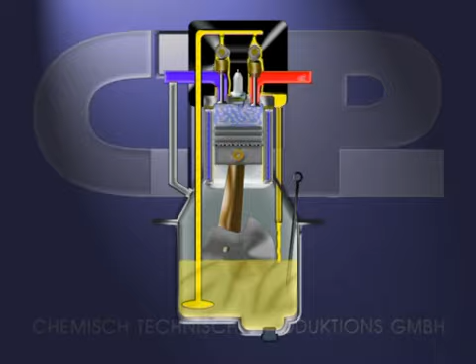Fuel, oil and lubricants and their effects on combustion engines. Every time an engine is run, deposits are left behind, and these always have a long-term effect on the way the engine functions and its degree of efficiency.

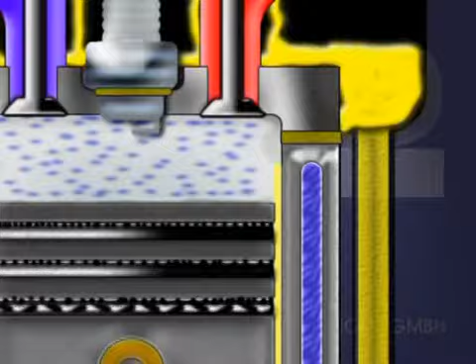In particular, compression is reduced as a result of sediment in the area of the piston rings, oil rings and their grooves. The deterioration in the combustion of the fuel-air mixture resulting from this leads to a reduction in the engine's performance. As a result of this, there is an increase in both oil and fuel consumption.

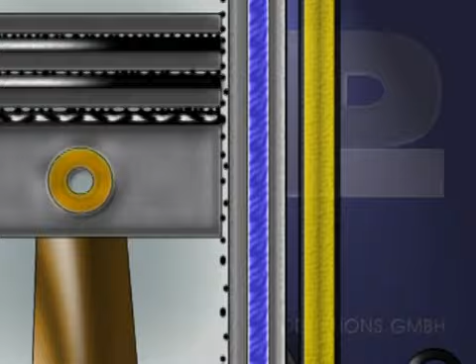This creates a situation where the sediment caused by the combustion process increases markedly, exhaust fume levels rise, and not least, the wear and tear on engine parts escalates.

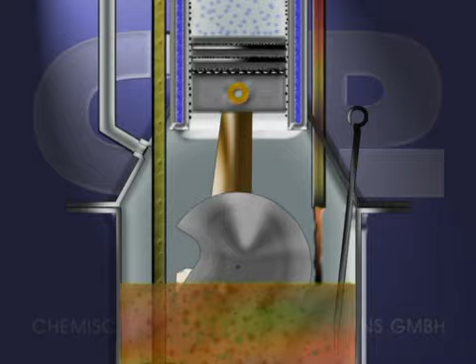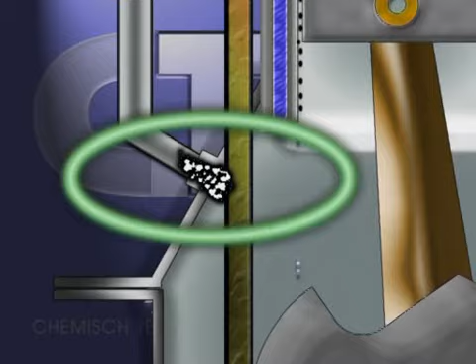Parts of the mixture and combustion gases evaporate in the crankcase and thereby accelerate the speed at which the quality of the oil deteriorates. And this can lead to problems in the crankcase breather system.

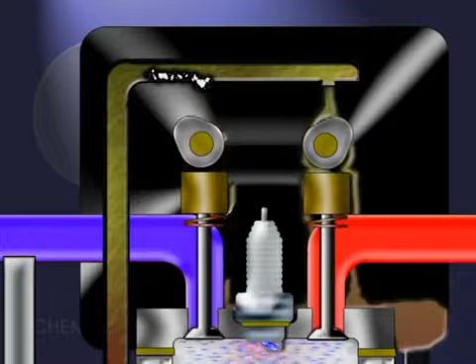Larger particles of dirt, such as the formation of resin deposits in the oil ducts, can trigger a reduction in the lubrication of important components. For example, the camshaft.

Now you can see how these harmful deposits develop. Would these deposits be removed during an oil change? Let's have another look at the inside of the engine. What happens during an oil change?

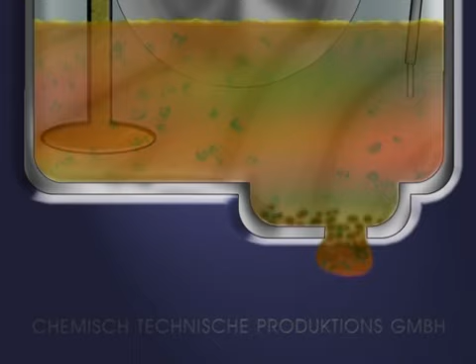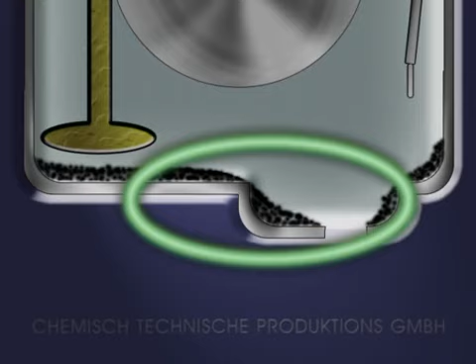The old oil is drained during the simple oil change process. However, not all the impurities caused by running the engine are removed when the old oil is drained off. Some of them remain in the form of deposits in the oil and the lubrication system.

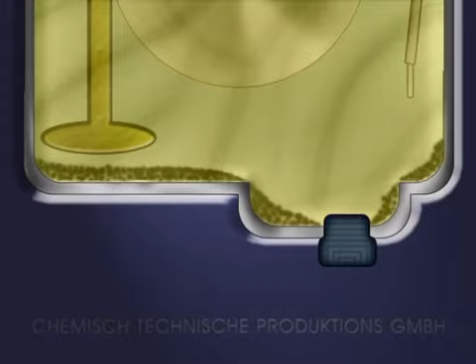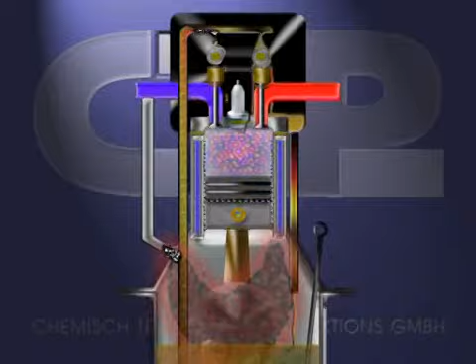Once the engine has been refilled with fresh, clean oil and is then started, the new oil absorbs the remaining deposits, and in a very short time, the oil is once again contaminated. This situation naturally has a negative effect on the efficiency of the new oil.

As you can see, a great deal of the harmful residues remain in the engine. To lastingly conserve the operational reliability and the economics of a combustion motor, we at CTP Limited recommend that at every oil change the oil and lubrication system is also cleaned. What exactly happens during this treatment?

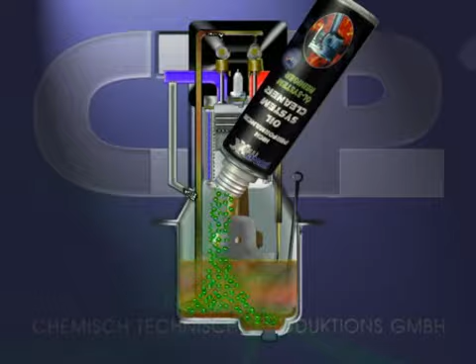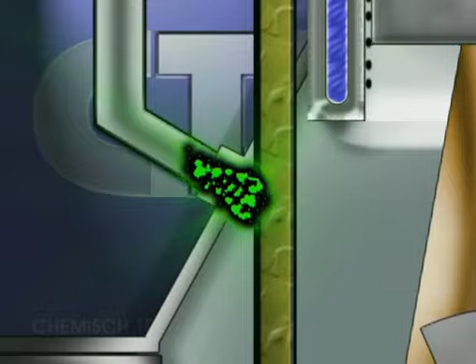The engine is run in idling mode for 10 to 15 minutes. During this time, it releases all the impurities caused by running operations in very fine molecules, as shown here at individual problem zones. In our example, this is the piston ring area, the crankcase breather area, the camshaft lubrication area.

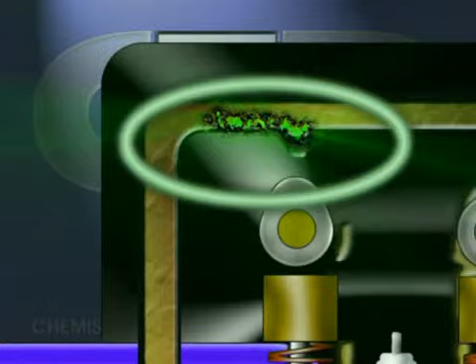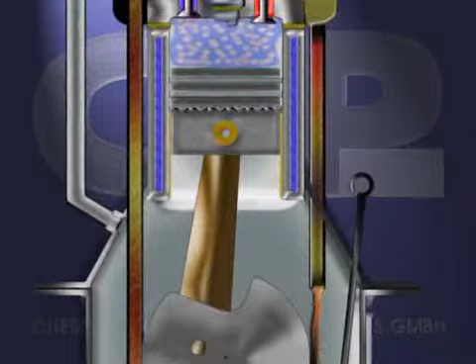At the same time, highly efficient lubricating substances protect the engine during the whole cleaning process. Elastomers, such as oil seal rings and O-rings, are kept absolutely supple.

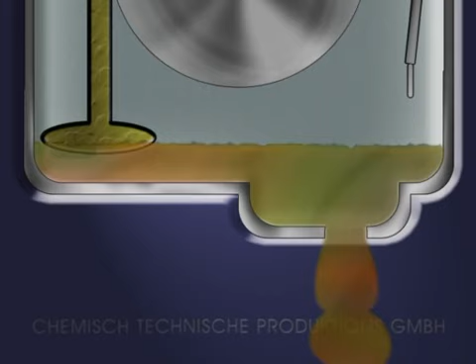All the impurities are now removed when the old oil is drained. This means that the oil and the lubrication system, which we fill with new fresh oil, are kept very clean.

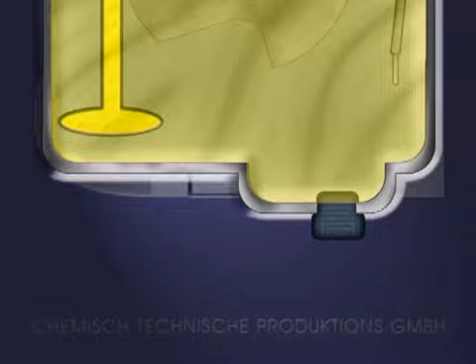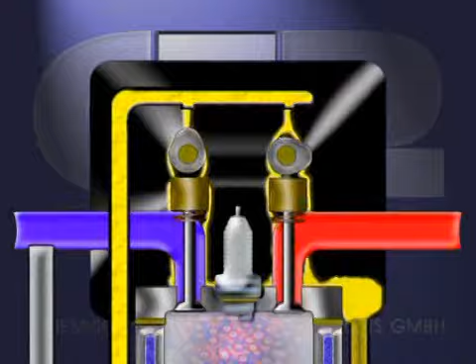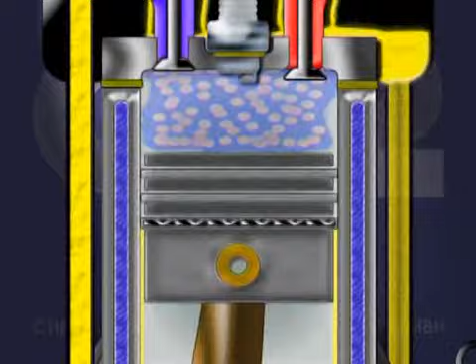Now, the new oil can perform to the best of its ability in a clean environment and fulfill the tasks required of it, such as lubricating, sealing, cooling, purifying, and keeping particles in suspense. The fresh oil is now able to absorb the impurities that have been newly created and is no longer limited in its ability to perform by the old deposits.

We can summarize as follows. When we use PowermaxX Oil System Cleaner, we have the following results: new, fresh oil in a clean engine, optimal oil and fuel consumption, optimal engine performance, and a longer lifespan of the engine and the engine aggregates.

Less wear of the aggregates. Lowest exhaust emission values. A longer lifespan of the catalytic converter. In order to keep the performance of your engine, it's time for PowermaxX Oil System Cleaner.